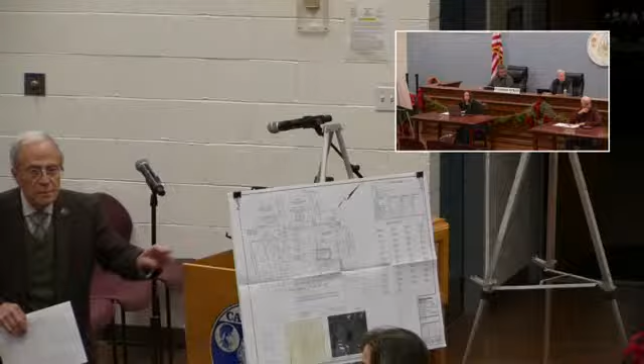I guess we could set it up there, or both places, you just turn around. Can we get them on both boards, or just? I think I only have the remote for the one, but I might be able to do both. Rich, we could move it around there, wire it there. Yeah, we can move around, we can get it set up there. It'll take a couple minutes, so let's do it now. I think that's good, I can see.

I'm gonna go sit right up there. Take your microphone with you, and then you'll be able to make comments if you have to. So Bob, all you do is sit on the other side. I'll turn it over to Suez.

We want to go through comments first. I think we need a quick minute to set up. Okay, this memo. Craig, I'll rent you a spot over here for buck two ninety-eight. Movie time? Yes, one pop.

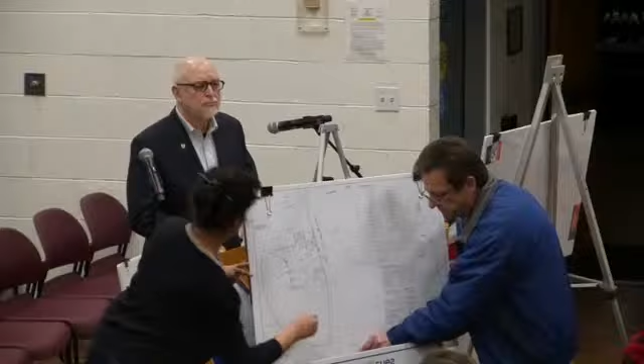Sure, thank you. Where would you like to be? Okay, good evening to the board. I'm just going to take a second to open the landscaping plan so everybody can see. We have the renderings on the screen and on the board below. Can you take a microphone with you over there? I think that microphone comes out. Oh yeah, great, thank you. Thanks, John.

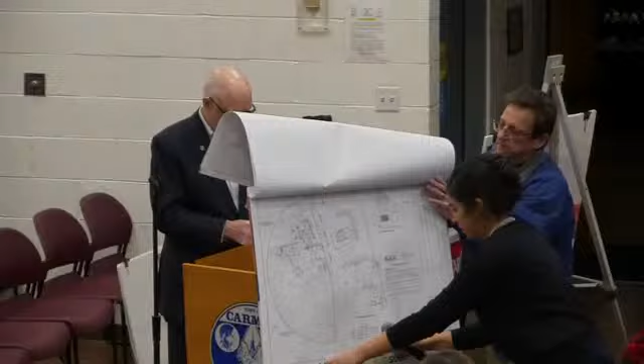From the last meeting, we were asked to do an analysis of the existing trees on site, and we went ahead and did that. There are really not many evergreen trees on site, just 2 of them, and both of them are going to be preserved. The majority of the trees on the site are deciduous.

We are proposing different species of evergreens to be planted, and most of the plantings are at the entrance to Brook Avenue so that the building could be shielded as much as possible. On the rendering, you'll see a comparison of how the plants would look at 8 feet height versus 20 feet height. We've tried to give as much evergreen tree coverage as possible so the building is shielded from the roadway, and because they're evergreen, this would be year-round coverage.

As far as trees being removed, we're proposing 14 trees to be removed due to site development issues and requirements. But we hope from the last time you saw the plan, this looks like an improved version. If you think there's something more we should be adding, we'd be open to your comments and suggestions.

Can you just clarify, they're being installed at 8 feet height? Yes, 6 to 8 feet height, depending on what we get.

And what is the anticipated growth of each tree? We do show it up to 20 feet, but how much do they grow each year on average? Green giants grow about 10 inches a year. Okay, so you're looking at a decade before they get to the size of the larger ones, right?

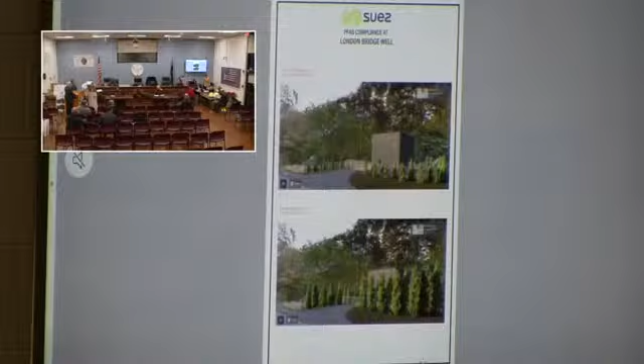This particular site, this thing is literally right on the road, and it's going to be quite big, and I do think it's going to be somewhat unsightly for people who live in that area driving by every day. Most of the other sites you're developing are set back or not going to be visible. This one is very visible. So, I'm only one of the board members, but in my opinion, we need to do something a little more on this one.

Sure, I would agree with that. We'll work with the applicant on that. These are relatively narrow, right, this type of planting?

Green giant arborvitaes? Yeah, you plant them 4 feet on center and in a couple years you just have a green wall. Hi, I'm John Atzl, Atzl, Nasher and Zigler. Green giant arborvitaes, if you plant them 4 foot on center, in a couple years you just have a green wall. They spread out to about 4 foot, so they would fill in.

How tall is that building? That's going to be 22 feet. And how wide is the building? The dimensions are going to be 22 by 22. So it's a cube. Yes. Okay, so to screen that building, you would need 5 arborvitae?

I can count that out for you. In other words, to take up the width of the building as you're driving? Well, yes, if it was right in front of the building, but as you're driving, they're out a little further, so it does go longer. Yeah, I understand. That's all.

I'm going with Ray's comment that if you could strategically place some taller ones, you're not spending the money on all of them being very tall. You might get some bang for it. What we've done in the past is, at the point of installation, if you notify Mike, he can help you site each particular tree in an appropriate location, so we're getting the right spots.

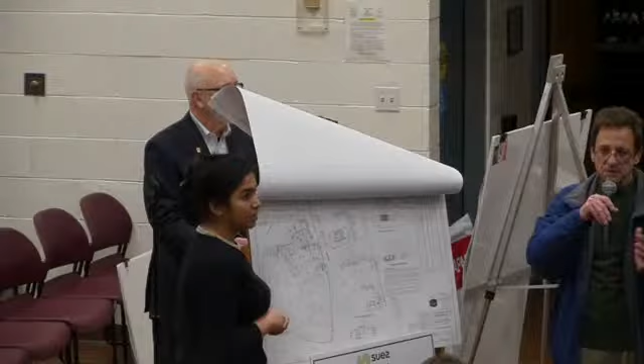A spruce or fir? Or something? Actually, if you look at the plan, we have green giants and eastern red cedars alternating. That way, if a disease comes in, it doesn't wipe out the entire planting, which has happened on other projects. Other municipalities have requested that. So we are alternating some of the plantings, but they're all evergreen.

That brings a question I had, which is, what is our confidence that if any of these plantings die out, they'll be replaced? They will have to replace them. It'll be a violation of the site plan if they do not. Okay. If it's on there, that is something enforceable by my department.

Any other questions from the board on this London Bridge Well site plan? The building can't actually be moved back, correct? It's a wetland.

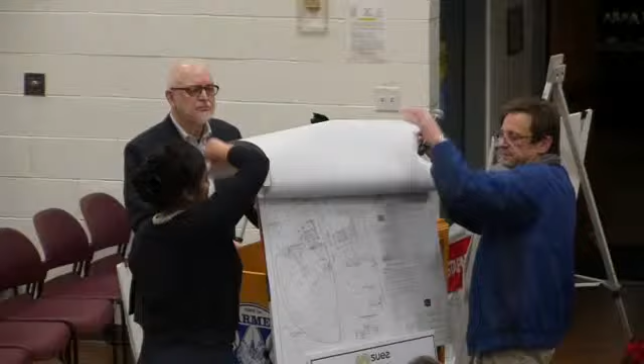We looked into that, but as far as I'm aware, site constraints are not allowing us to do that. It actually drops off quite a bit after you come off, and that's one reason we have to install retaining walls for the driveways and everything. But we do meet the minimum front setback, and I think we've pushed it back pretty much as far as we can. Brook Avenue's edge of road isn't exactly at the property line, so there's probably about 5 more feet in there. So we're really looking at maybe 35 to 40 feet off the actual edge of the road.

Just wondering, because pulling it back further could actually lower the building and make it not look so tall. That's all I was thinking.

Are you going to need to bring any fill on site for this? I believe we will, and we'll adhere to the town engineer's comments about the notes required for the site and the amount of fill. We'll do a cut fill analysis.

That's going to be my same question for all of them, so just any fill brought on site, we need to make sure it's clean as per regulation. That's understood, and I believe we're probably going to end up doing a cut fill analysis for all 5 sites, and that notation, if any fill has to be brought in, will be a note on the site plan for all 5. I know there's a lot of documents here, and I've read through them, but can you explain how the lighting and parking is going to work for this specific one?

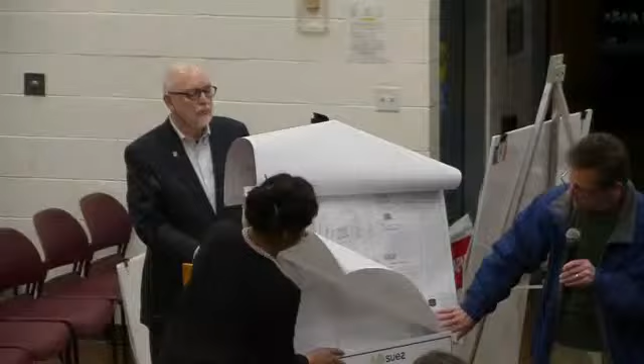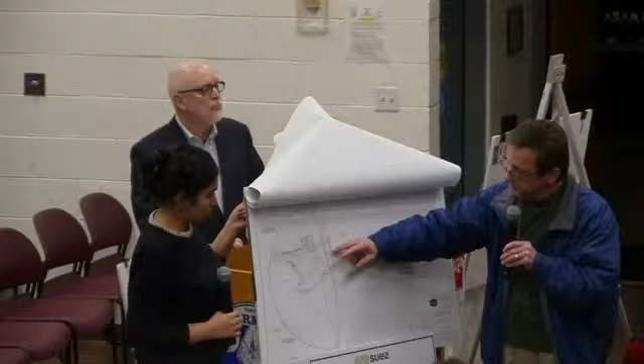How the lighting and parking, your own parking. Well, basically lighting, there's only going to be lighting above the doorways to get in, and they're not large fixtures, and the light doesn't get thrown out. There's one on the south side of the building and one on the west side. We have provided the Isolux lines and the foot candle values. They don't come anywhere near the road or any of the neighbors.

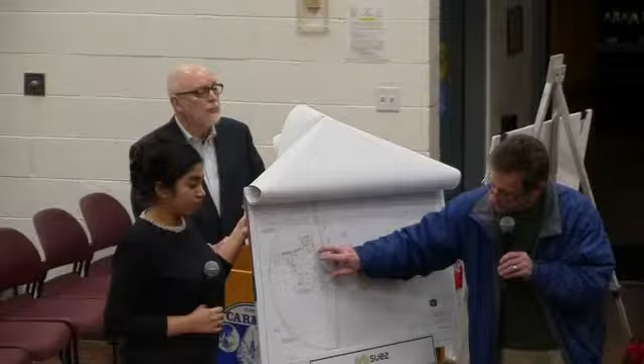And the parking, actually, you have to remember, these aren't going to be regular cars. They're going to be 4-wheel drive pickup trucks and vehicles with high ground clearance. They'll come in and enter the site, either park over here, back up and leave, or park over here, back up and leave. There's room for some stacking, and they'll be coming and going basically together if there's more than one vehicle.

This isn't a daily operation where somebody's going to be there every day. The operator will be visiting daily? I believe it's checked daily, though. Yeah, daily, okay, so it is. I thought it was once every week or so. No, that's daily, got it.

Will that daily check be during the day? Yeah, it'll be during regular business hours. Do separate vehicles come in to change the filtration media and stuff like that? And if so, how often does that happen?

Hi, good evening. Steve Garabred, Manager of Engineering for Suez.

With regard to carbon changeouts, we expect it would be every 1 to 2 years before we'd have to change it out. Didn't know if it was weekly or how frequently they had to do it, so you're saying yearly? Yeah, yearly to every 2 years. Yeah, it's a big job to change that out.

I just wanted to speak to the landscaping. When you transplant these trees, it's a shock to the trees themselves. The smaller trees tend to actually grow faster when you first plant them because they recover a little quicker than a larger tree. So it's not always better to plant a larger tree. While it might look better initially, the smaller tree may grow at a quicker rate and catch up.

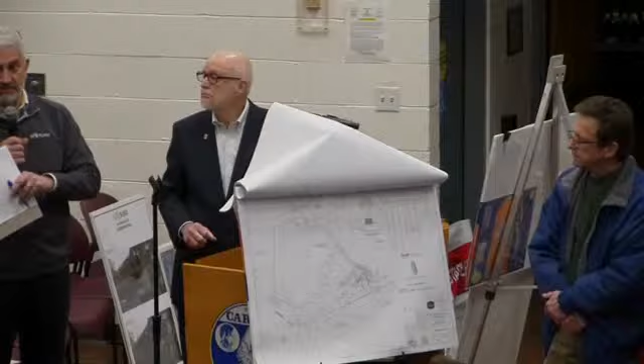Any service upgrades can be underground utilities? To get the electric utilities to the site, it's got to go above ground first. Once it gets to the site, we'll drop it down the utility pole and it'll be subsurface. But to get it to the property, because it's got to come from a cul-de-sac on the opposite side, I forget the name of the street, but that's where the service is, so it's got to be overhead to the property, and then it'll be subsurface. That information needs to clearly show where the existing electrical is and where you're going to be burying the new electrical. That would be perfect, we will detail that.

How is it currently set up? Right now, I believe it's all above ground. So all the way out to the unit itself is above ground? Yes, it goes right to the well house, I believe, above ground.

Do you want to present anything architecturally? I have it up in front of me, but feel free to speak to it. Sure. As the consultants just mentioned, we haven't submitted a formal landscaping plan because we believe there's adequate vegetation on the site currently. As you can see from the rendering, the top picture is where the site actually is, so you can get a sense of the amount of vegetation around it. We don't anticipate any visual impacts thanks to the vegetation. And below that is the street view.

Andy, can I request you to zoom into the bottom portion? Yeah, if you could hover around the building, that might help them identify where it is. Yeah, the building's actually, you see the corner of it, it's all in shadow. You can't really see it because the panel color is green. So the building is actually visible from the street, just barely, the back corner of it. But because of the color of the panels we're using, hemlock green from the manufacturer, and the shadows you see, it blends significantly with the existing landscaping, so it's almost imperceptible from the driveway.

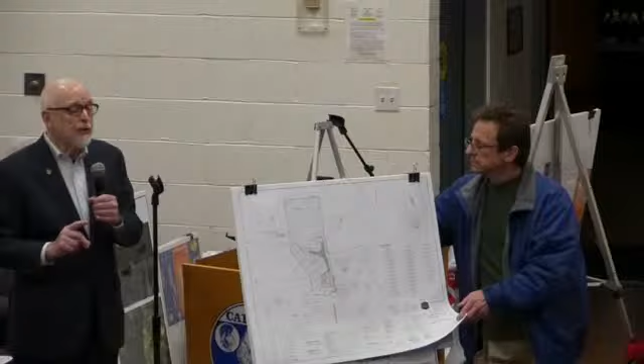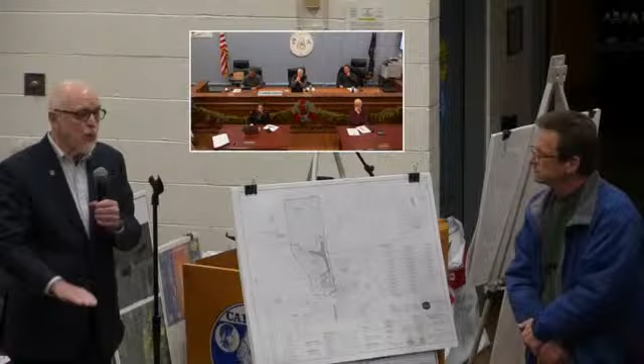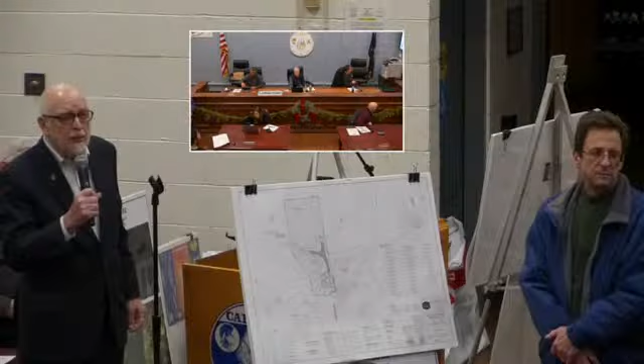We showed you a rendering before of the building, so we need to point out that we've had to make a change. The existing proposal before you is that the lower 4 feet is what's called a split block foundation. However, it does not meet state energy code. So consequently, are we switching to the illustration that shows it well now? Yep, so we're switching to a concrete panel, and now that shows you the lower part of the building is now a concrete panel. I don't think it makes a big difference, but we certainly wanted to be sure that you were aware of it.

So this is shown as the basic color. It's just concrete, like a raw concrete color. It can be painted. I think that this split block was brown or tan. Yes, correct.

So these, the current, looks like there's 2 white buildings there now, correct? There's several, but looks like there's 2 white buildings there now, is that correct? Was one of those a generator? It's a generator, yeah. There's a spring house and the generator.

I understand that there's switch over, but when we build a new building and it's up and running, can't the other one be sunset? We're going to ask Steve to take this one.

No, that's the easy answer is no. So all the existing equipment inside the existing building is going to continue to be used. We're providing the treatment on the front end, and then there's storage tanks that are buried behind that building. So the water's going to continue to go through those, be chlorinated, have the chlorine contact time, and then we have booster pumps out of there to the distribution system. So all of that will remain. So we're adding a system to this, but the existing system has to stay.

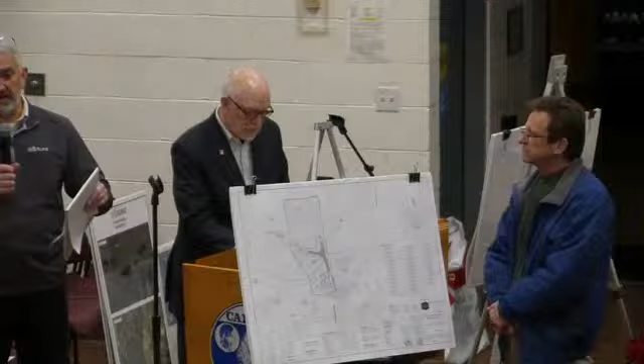Meaning behind the building, the side? I don't believe so. Here's why. You got to remember those generators have batteries, so you have to always have it connected to electricity. There has to be a trickle charger charging the batteries up, an engine block heater, all of that.

So it needs to be close to utilities to maintain all of that. So I guess the question with respect to the generator really is, if that's there all the time, it's a permanent feature on the site, so it should be reflected on the site plan. It's not now, so it's now becoming a permanent fixture. So if it comes in and out, moves around a lot, that's a different story.

It could, I mean that's just it. Can you clarify that for us? But if it's always there, if the tires are deflated and it's never moving, I don't believe then that's the case. If it does move and you shift it around to different facilities, then it's a mobile facility. So this site is one of the larger ones, and so I believe they keep the generator there.

If this site had power and another site didn't have power and we didn't have a generator, we would grab this and tow it over to the other site. The portables give us flexibility during storm events.

I hear you, but it's an interesting issue to Bob's point. If it's there 364 days of the year, we should worry about its color and screening and so forth. Exactly, and placement. But if it moves around all the time, less of a concern to us, obviously. So if you could clarify that, maybe a little more detail about how it really operates and where it lives all the time, that would be helpful.

And if it's going to be there for the vast majority of the time, can you do something with the color? I mean, white stands out, it should be the same color as the building. Okay, we will look into that and add it to the responses to staff.

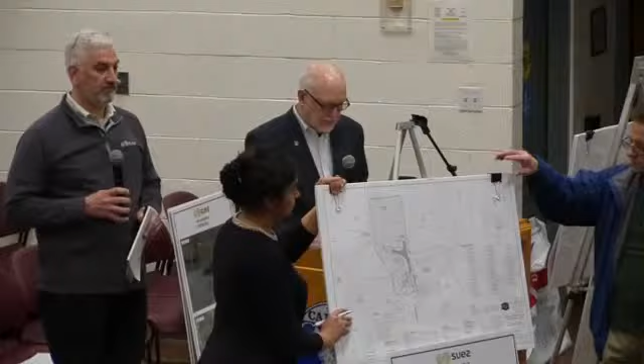Yeah, and I think Anthony's point is, could the generator be somewhere not on the road? You have all these other properties, is there a better place for the generator to be stored, knowing that you need a generator? Yeah, will do. We'll investigate it. Okay, I believe Mahopac Wells is next.

Mike, you had comments? Everything was basically the same.

The only comment I really had was that if you can move the buffer closer to the building, you may be able to get more of the building covered with trees, as opposed to right now, it's all looking pretty much below the building until the 10 years comes, or however long. If you move them up the hill, that's a hill, it looks like in the picture. I could be wrong, but in the picture it looks like a hill going up. So if they put them maybe closer to the building, it may break it up a little bit further.

Is this the one over here on Bucks Hollow? Yes. Access is off Bucks Hollow, yes, but what is the view from the other side? Because this is from the people on, I can't think of the name of the road, Nottingham Way. Coventry Circle. Yes, Coventry Circle. Because that's where we were really getting the most calls, was from the Coventry Circle side. I guess that's where they were concerned about the looks of the building and how big it was going to be and everything.

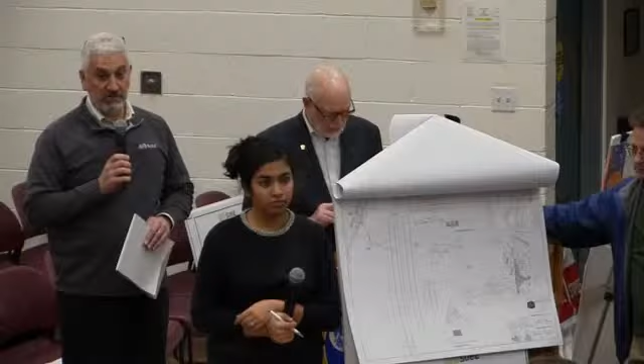The trailer on site is an iron and manganese treatment trailer that currently treats one of the wells. We had to run a pilot study to demonstrate that the technology worked before we were able to submit our plans to DOH. That trailer continues to operate today and treat the water, but once we have the full-scale facility in place, that trailer will be taken out of there.

And will that be reflected on the plans? Yes. I thought I saw a note that said, to be removed at end. The existing well house that's out there today will remain. And I know there was a generator there as well. That's correct.

Rich, you had some comments also. Thank you, Mr. Chairman. Pretty much the same set of comments when it comes to permits and referrals, regrading, traffic. There's some easement information that was provided. I recommend that it be reviewed by Planning Counsel. There's the permit performance bond engineering fee.

Applicants, are you still requesting a waiver of the landscaping plan? You are showing landscaping here now, but it was requested on this one? We did request one initially, but after our discussion with the residents and the board's comments, we have provided screening, as you can see, so we're not requesting that anymore. So never mind that comment, just provide that landscaping plan.

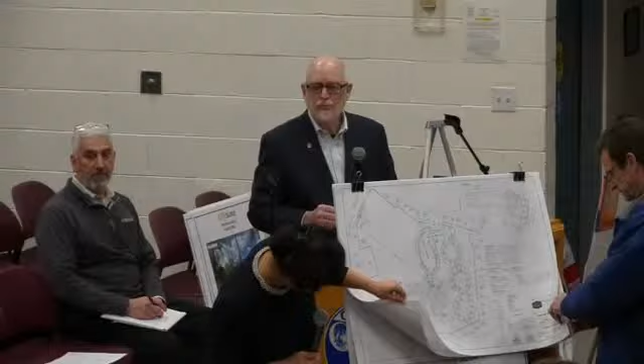Again, the whole electrical utilities, they're saying an upgrade is going to be there, should be installed on the ground, the extent of utility should be provided. They provided a wastewater report, and on this one they are looking to connect that iron well back into our water treatment facility, wastewater treatment facility.

You need to provide loadings to the system. What happened was you gave me a flow, you gave me some parameters, some of them are high. I need the loadings, and you got to really look at section 120 of the town code to find out what we're looking for. I recommend you just put the parameters in alphabetical order, it's just easier to read and understand.

You have in the wastewater report how you're going to connect, but that should be in the full set of drawings that's going to be built, right? So whoever's doing this work needs to know how they're going to connect into the Town of Carmel sewer system if we allow you to do that.

It should meet all the requirements in Section 120. The full set of drawings should have it. There are road specifications: 12-inch Item 4, 3-inch base, 2-inch binder, 1-inch top course. They need to be identified if you're cutting into the road or Town of Carmel road to access that sewer.

Thank you, Rich. And Pat? We talked about the one item, which is the landscaping. Again, new landscaping plans supplemented up by Coventry Circle, not by the building, which is probably the right approach to this. Whether you think there should also be landscaping down by the building, up to you.

The only other difference with respect to this one is visitation. Because of that manganese treatment at this location, they do need to collect backwash from the system that's trucked out with a waste hauler, and that's done weekly, I think, from this location. So this has larger trips, but only once a week.

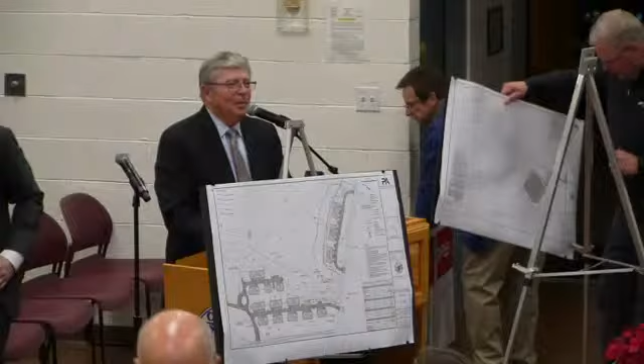Good evening, and thank you. It's been a long night, but my name is Richard O'Rourke. I'm a partner with the law firm of Keane & Beane in White Plains. I'm here tonight with David Leibowitz and Larry Boudreau from Centennial. We also have Jack Lanneman, Senior Division Vice President for Toll Brothers, and last but not least, making the presentation, Chris Laporta, a professional engineer with Becerro Associates.

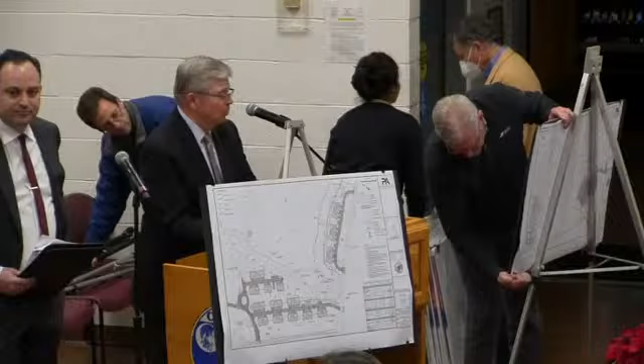All of you know the Centennial property, and obviously the plans are very comprehensive. There are 3 separate applications that have now been filed that would bring this project to fruition. So with that, I'd like to turn it over to Chris—unless, Mr. Chairman, you want to hear other consultants' comments first? I had some comments, but thank you for the introduction, and again, thanks for your patience tonight. It's been a long night.

I think you have the condo one, or the townhouse, up first. We have the golf course up first—is that correct? Centennial Golf Course, 185 Simpson Road. The applicant proposes to change the tee box and move the parking area over to land in the southeast to make room for the townhouse development proposed on the corner of Fair Street and Simpson Road.

The already submitted lot line adjustment must be approved and filed before the amended site plans for the multifamily development and the golf course can be approved. So for the future, the order has to be lot line first, so they have to get that approval before anything else can happen, or else the lots don't exist.

We have a lot of confusion with the narratives. The narrative for the townhouse is included with the golf course. I don't know if that's on purpose or not, but it was a little bit confusing. The lot is labeled 44.2-2-2.1. I don't have that lot at all, so I don't know if you have it mislabeled or we don't have 44.2 as a tax ID number, a tax map.

That was on all of them, actually. So the required parking for the golf course is no longer in the town of Carmel. It's now all in the town of Southeast. We have no control of the parking spaces, number, aisle width. Technically, in our town, you're required to get a variance for parking because you have a golf course with no parking in our town. The town zoning board gives that variance because it's on an adjacent lot, but it is something that in the code it says that they're the only ones that could give that variance.

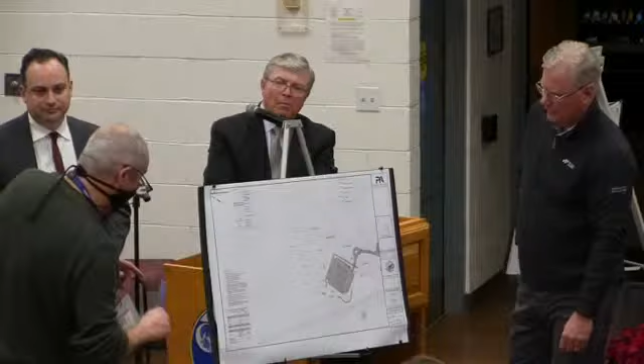Right there, there's the line. So they're talking about water and sewer details for this, but we're not putting any water in. Not that I know of, there's no water or sewer going into this parking lot. So why have the details on a drawing that's not needed? Yep, that makes total sense.

And there's no wetlands there, why are you talking about wetlands? So you need to kind of go in there and clean that up, please. Yep, that's no problem.

Basically simplify. You're going to need this, so both sites, this is a common plan of development. So no matter that it's in the town of Southeast or the town of Carmel, the stormwater has to be addressed as a common plan of development. Over 19 acres, you've got to deal with the DEP. 19 acres of disturbance ultimately. So I know you're not doing it all at once, but you're going to have to make sure you account for the stormwater features that are going to capture and treat the stormwater for the 19 acres of disturbance.

Regrading, fill, traffic vehicle movements, all the same. Landscaping plan was provided, you've got to add some notes. It's unclear if additional electrical utilities are being installed here or on the other plan. You should delineate the area of disturbance by orange construction fencing. A lighting spill plan should be provided. Driveway requirements are 8-inch, 3-inch, 2-inch top. Got to meet sewer code, section 120.

So there's a whole bunch of other detailed comments, and again these are the same detailed comments I'm going to make for the next one, the townhome one, a couple of different ones, but that's about it. So there's a lot here that needs to be worked on before we move forward, or as we move forward. Thank you, Rich, good points.

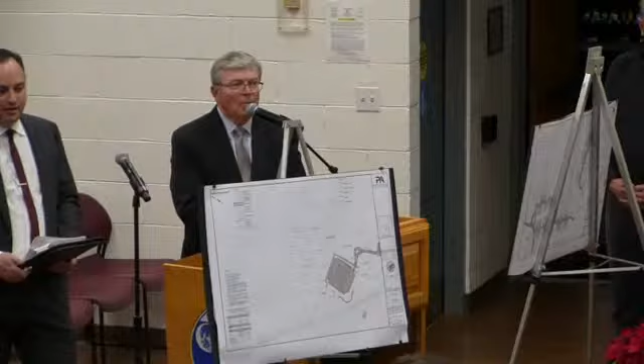Would we start the ball rolling with Southeast allowing the park to be there? That's not our call, it's Southeast's call. But before we go forward with anything — here's the answer: SEQR will be the umbrella to coordinate both municipalities' review of this. That's why I'm suggesting we designate that tonight, so we're running the show, not Southeast, and they'll be under our control through SEQR, with you being lead agency, driving the bus. I wasn't implying you needed a variance for the parking — that's not our town, so no, you don't need a variance because the parking is not in our town. That's the only thing I was saying.

So we might want to quickly go through — we just touched on the 8th item on the agenda. We can touch on the 9th and 10th to give you feedback on what we think, and then you can give us an overview, since I assume your overview isn't just of 8, 9, or 10, but of the entire project. Precisely. And I understand the necessity of breaking it into component parts, but from our perspective, it's one development, and from your perspective it is too.

It's kind of fascinating — I bet most people don't even realize where that town line is, because it bisects the entire project. We had a similar situation many years ago when I was town attorney in Southeast with Peach Lake, and we needed special legislation because half the lake was in Westchester, half in Putnam, half in the town of North Salem, and the other half in the town of Southeast.

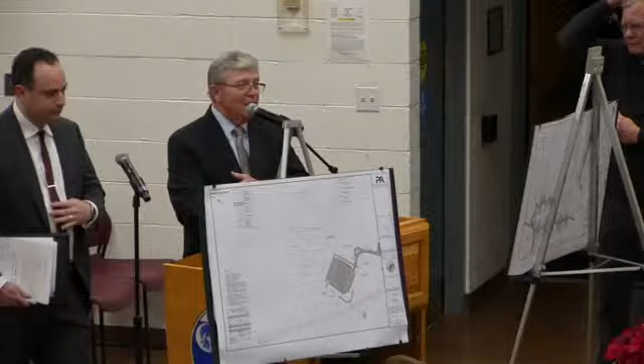That was a mess, but fortunately, we got through it.

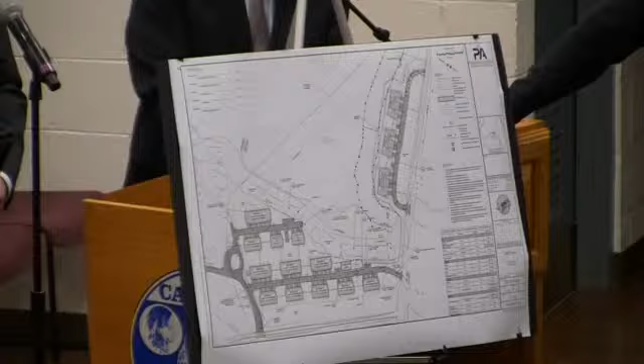This is now a multifamily development pursuant to our code provisions. They meet virtually all of those criteria, with the exception of the recreational open space, as Mike mentioned earlier. If you remember from Pulte, there's a square footage required, and it's fairly significant. The clubhouse is only a couple thousand square feet. I think the number required here is 18,000 or something like that - it's a relatively big number. In the Pulte case, the length of a trail counted toward that number, so I don't know if they're counting the golf course or other elements, but right now they would be deficient. That's a variance, so clarification is necessary.

Those are the big planning issues at 30,000 feet. And one other thing - it's unclear if any of those roads are going to be dedicated to the town of Carmel, and that's something that still needs to be talked about and reviewed, and would have to go to our highway superintendent.

We're not planning. That's wonderful to hear - make sure it gets documented every which way but Sunday.

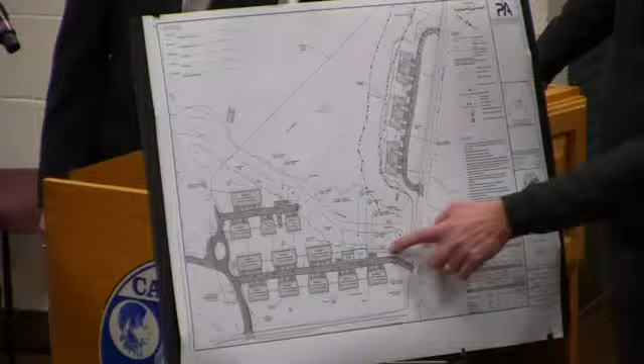How big is that clubhouse going to be that Pat just mentioned? Basically there, 20, 1,500. The plan shows it a little bit bigger - 2,400, actually plus or minus 2,400. Then there's the pool, and there's pedestrian access from these to the amenity area. So we'll demonstrate for the record, your requirement in this case is 18,900 square feet.

For recreation? We're going to have to have more. Actually, to Pat's point earlier, might as well ask the question now - why is the clubhouse and the pool over there closer to the road, not to the center of the development?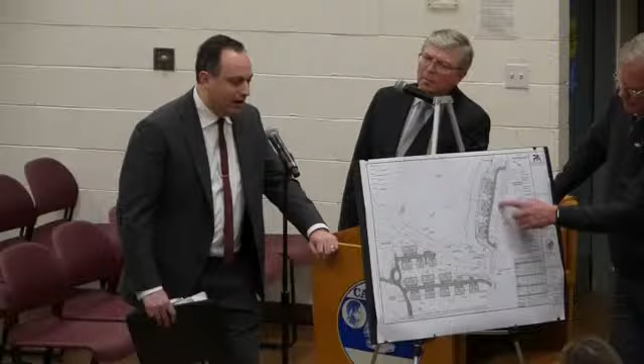Well, it's there for a number of reasons. One, I think it fits there staying out of the 100-foot wetland buffer. Two, the development - these houses - it's all within a fairly walkable distance, I'd say less than a quarter mile. So even though it's not in a central location to the development, it's certainly accessible to everybody, no matter where their house is, including the ones on Fair Street, I assume you were pointing at.

All right, so there's no proposed walkways on Fair Street because there's a lot of traffic there. It's not on Fair Street, right? It's okay, no, I was on - I mean, that's a fairly busy road. So is John Simpson, for that matter, on Fair Street putting up the sign. I'm thank God you didn't get run over.

How would the residents in those three buildings get down to the pool? Right here, inside, within the - okay.

Do we need to bring someone up who would make the determination on the health of the wetland you were talking about? So it's the specialists - they brought in some specialists, we would bring in a specialist to review this as well. The fact that this is also a state and federally regulated wetland goes beyond just Rich's pay grade, and DEC as well.

So it's an interesting concept, and here's the issue with respect to that. If it's a crappy, poor quality wetland, by allowing this to occur, as I've suggested, they can mitigate that by improving the quality of the wetland, rebuilding it, making it a functional wetland that's really ecologically significant. So I don't know what we're dealing with - it may be pristine and wonderful, keep away, or it may be garbagey and full of shopping carts and tires. That's the question. We would need specialists to look at this, as it's a significant ecological issue. And the other thing, I'll say it again, is the DEP will have their finger in that wetland also, not only stormwater.

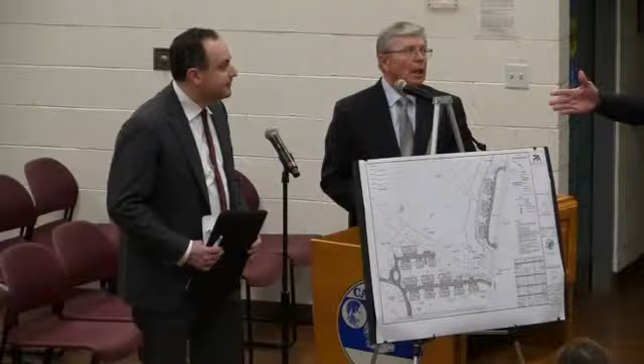And Chris, you engaged DEP, right? Yeah, since June we've been talking to the DEP. We showed them the plan. Before we got here, we were working on it for a long time to get a feasible plan, looking into the environmental sensitivity and performing some of the studies that were in our initial application. We've actually had two pre-application meetings with the DEP and met them on site for soil testing to do some deep pits.

They seemed generally okay with what we were proposing in the buffer, because the buffer area right now is a practice area, so it's a maintained lawn. What we're doing is putting stormwater management in there and plantings that are actually more appropriate for a wetland buffer.

But just so you all know, the DEP has a different perspective than the DEC does, and frankly the Army Corps too. So corralling all the cats is the challenge here. I get it, the easy thing is just let's not touch it, but again, let's think about it.

The only other thing I will add is, are there going to be manicured lawns in this area, and how are they going to be irrigated? I would recommend that you do not use the water district supply water for that. As a matter of fact, that's going to be part of the requirement. I'm telling you that right now.

No irrigation connected to the municipal water supply. The landscape will— that's fine, make sure that's noted and shown on the drawings, how that's going to be done. There has to be a hard disconnect to make sure they're not touching the municipal water. That's important.

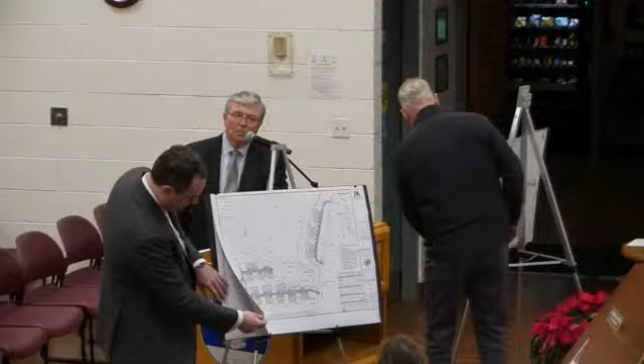Okay, and last on the agenda tonight, Centennial Golf Course, lot line adjustment. Mike?

Same comment about the tax map numbers, we'll go over that afterwards. Lot line adjustment law only allows for the transfer of 20% or 20,000 square feet of lot area. This submission does not comply; a variance is required from the ZBA. This type of project is not really the intent of our lot line adjustment law. It was more to fix a swing set on a neighbor's property and things of that nature, but it's not written that way. But if they get the variance, they would be okay. And before anything is referred to ZBA, all tax ID numbers need to be corrected on the plat and verified. We need to make sure we get that straight so that we're issuing to the right lot for the right variance. Thank you. And Rich?

So the comments I have are just basically directly out of the code, section 156. Copies of restrictions or easements should be provided. Signature block for chairman to endorse the approved plat should be there. Key map at a scale of 800, showing the subdivided area in relation to the entire tract. Location of setback lines and the setback envelope, I don't know if I saw them. Existing and proposed covenants, deeds or restrictions, location, composition, approximate size of monuments. Signature block, I have that in there twice, sorry, and label old and new property lines. So just go into 156-61, update the drawing, and that's what I need, for engineering, for the lot line adjustment. And you'll get all these comments that you haven't already.